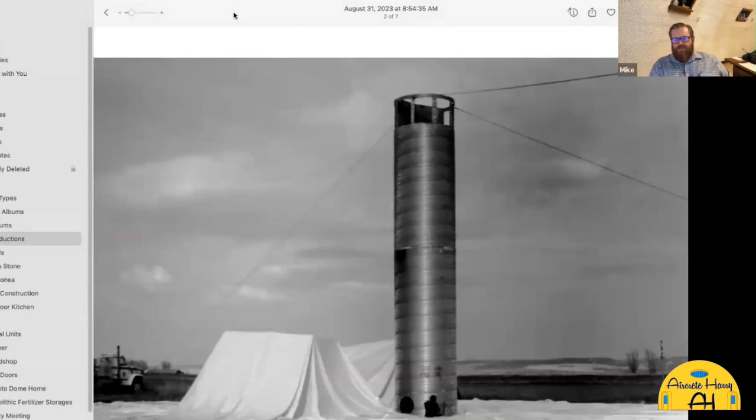The first monolithic dome ever built was built in Shelley, Idaho, as a potato storage. Not quite as pretty as the ones we build today, and neither was the camera's ability to take those pictures. The potato storages had this central column so they could blow air inside of them, through the potatoes, to keep them fresh. Their company before that had really been spraying polyurethane foam, so they'd foamed tons of potato storages and knew a lot about the ventilation systems it took to keep those potatoes where they were supposed to be.

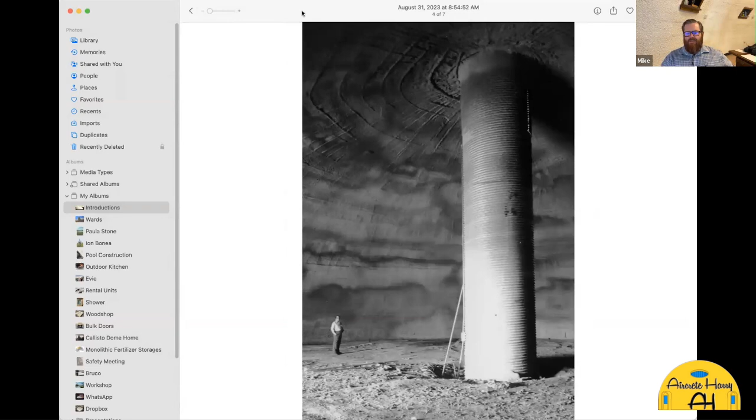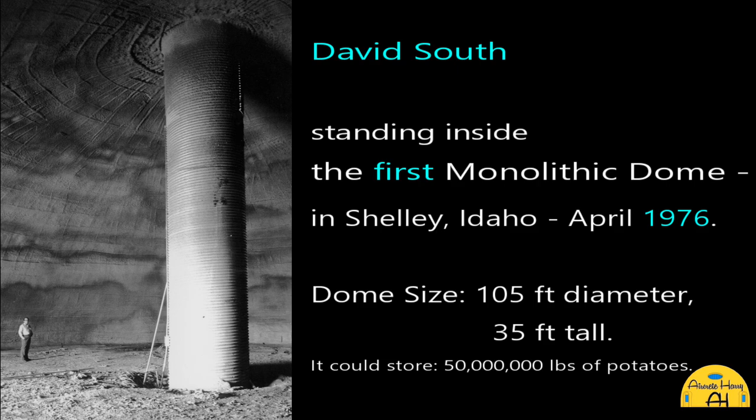There's a picture of that dome, Dad. That dome looks huge. Any idea what size diameter that was? I can't remember, I think it was around 100 or 110 feet. That was the first dome they built, and it was huge. He didn't try a small one first, he went right for the big ones. That's right, and if you knew my dad, that's the way he was - hey, this will work, let's just do it.

I love it. I also love discussing with my dad when he was here, and he was telling us about the first domes and the amount of reinforcement they put in there. Look at that, that is spaced - I think Dad was telling me they spaced it almost 2 or 3 feet apart at first, not as much reinforcement as we put in today.

And there's a picture of me on my first job site, young Mike with his shades, looking real cool, on the right with my safety colors.

It's pretty fun. This picture behind us, I think this is the Emmett High School - I could be wrong about that. This was back in the days where, when they built the first domes, Dad would strip the airform off to expose the inner polyurethane foam layer.

But they quit doing that quickly because it's pretty challenging to coat polyurethane foam and keep it coated well. There's just another fun picture of me there on the job site.

So to answer the question, I've been doing it for a long time. Yeah, you've been doing it all your life.

When domes are first inflated, I was taught by my buddy Dan that it's called a birthing process. Is that what you guys call it also? I guess we're not as creative with the name, we just call it inflating. We had to quit calling it blowing them up because people don't like to hear you say you're blowing up buildings. But yeah, we inflate them.

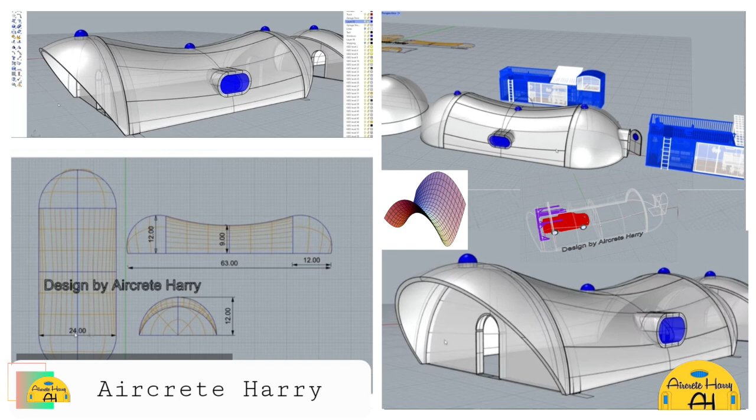And then the second strongest, which is what I'm building next, is the hyperbolic paraboloid, because it's also got two curves. It has a curve in one direction and then a curve in the opposite direction, like a horse saddle. That would be a hyperbolic paraboloid shape. It's basically a 24-foot dome cut in half, stretched out, with a slope going in the middle. With the two curves, I get a lot of strength with that.

So yeah, let's go right into it. You got some videos or photos to show with the dome? Maybe you got a picture we can show of the Eye of the Storm. Before I get too excited about showing you all the cool houses we have, and then getting into all sorts of trouble and getting out of trouble I should say, let's start with maybe that video to explain to everybody how domes are built, shall we?

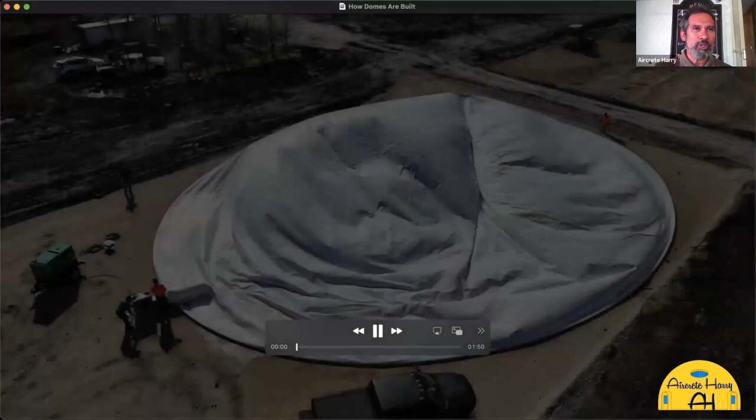Yeah, that sounds great. Now this is the monolithic method for building domes. They have two methods, if I'm not mistaken: the monolithic version, and then the eco shell version, which is the version that I work with. Both versions start the same way.

Here, that's with the concrete floor or the ring beam. This particular project here was for fertilizer storage, kind of a small one.

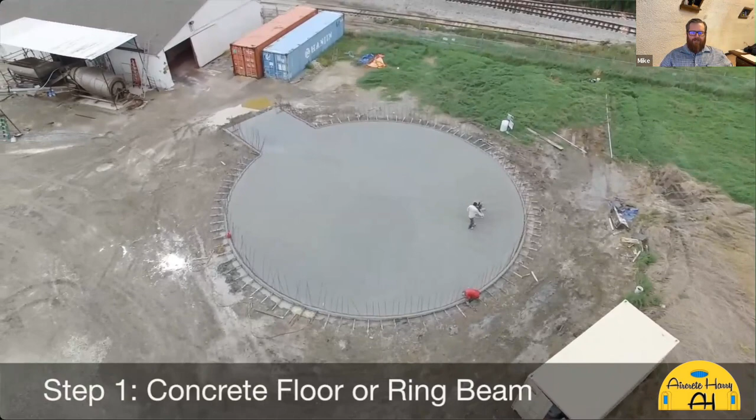The fertilizer storage is interesting. Ammonium nitrate is a big thing in Texas, and it's been involved with a few explosions, particularly the one in West Texas, where they just leveled the town down almost with an ammonium nitrate explosion. So Texas has been very sensitive to that, and the fire marshals are telling all these facilities that you've got to find a fireproof way to store it. Well, the dome is just an automatic win, a complete concrete structure, nothing to burn.

And so we've built quite a few of these, and some of them are quite small, like this one. This is actually only, I think, about 50 feet in diameter.

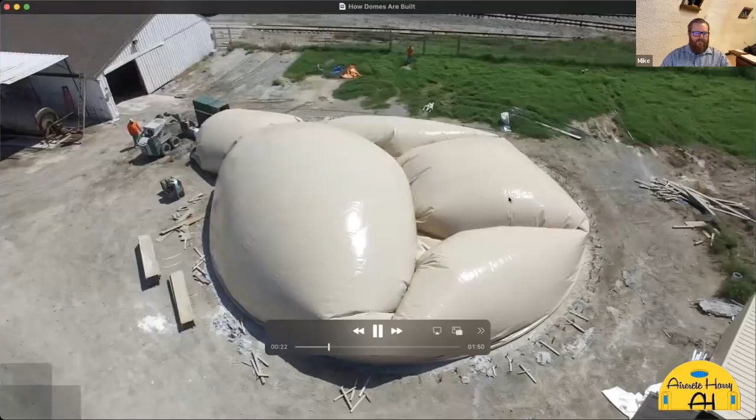It's a pretty small dome. The other method is the ring beam, pictured here, which is just a concrete ring poured on the ground. The airform is then spread over and attached to the beam or the floor, and that's where we inflate it. We don't blow them up anymore, we inflate them.

The airform is incredibly strong. The air pressure is not very great, just 2 inches of water column. Water column pressure is simple to measure with a tube full of water. You can measure the difference in the water level, and in PSI it ends up being about 0.07 PSI.

There's a name for that tool, which can sometimes be a tongue twister for me: a manometer. Super low pressure, but the amount of weight it can lift is incredible.

Now, this is another benefit of the dome airforms if you purchase them from Monolithic: you can have all your different protrusions pre-sewn into the airform. So as you can see here, the window protrusions are in the airform, and they also have that for the doorways. It's really nice to speed up the process, and you'd have your window forms already there. So that's what you're seeing in this image — the protrusions already built into the airform.

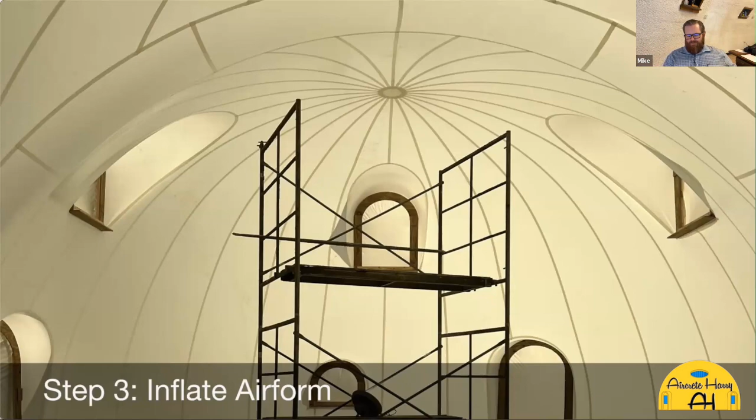That's one of the natural progressions of our business — nobody wants the same airform, nobody wants the same shape of dome. Most dome customers are very creative, they want to have fun with their structure. So we've gotten really good at doing some really creative inflatable shapes, which today we'll get to see a whole lot more of.

So you can kind of see this, we call them saddles — this archway in between the domes, you could walk in between the different ones. I like to also describe this as a soap bubble dome, because you have multiple bubbles or domes connected to one another like a soap bubble. That's the type of shapes you have inside, that's a good way of describing it.

How thick is the polyurethane foam sprayed on? 3 inches typically. For most people, if you don't know polyurethane foam — and I'm assuming this is the closed cell foam — yes, it's considered the best insulation you can get. It's number one for insulation.

What's the R value for that per inch? Well, the R value is only about 7.5 per inch of foam. But we could start a whole other video about R value — my dad called it the 'R fairy tale.' On our website, if you're interested, my dad wrote a big article about R values and what they mean and where they were derived from.

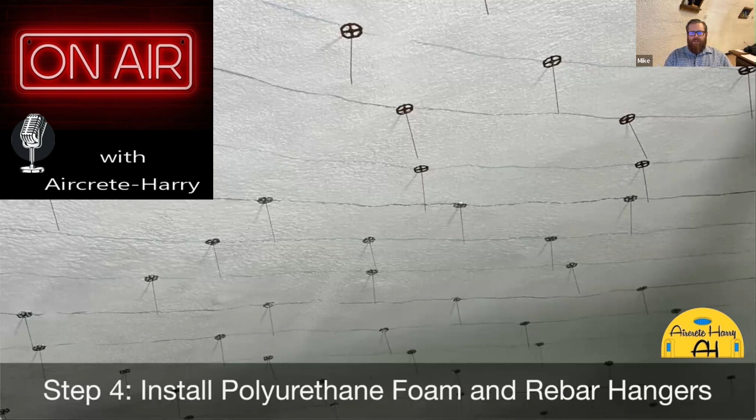This picture shows the rebar hangers. We were a little out of order since the last picture showed the hangers already in place. At this stage of construction, the first 2 inches of polyurethane foam would have been applied, rebar hangers are placed, and then another inch of polyurethane foam is put on top of those stickers to hold them in. We call them stickers or rebar hangers interchangeably. Then the structural steel is tied in next. This building pictured has number 3 rebar, which is 3/8 inch diameter, tied at 12 inches on center.

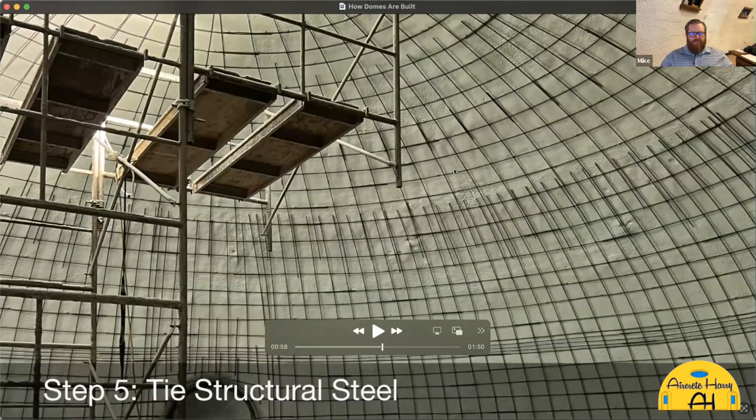The hoop bars are the first bars to go on, and they're pretty easy to keep spaced at 12 inches. But we have a pretty creative pattern as we go up with our vertical rebar so we can maintain that spacing. That's because of the wedge shape, or gore shape, that happens with domes, since you're wider at the bottom and tapering to the top. That's why they have to come up with these rebar patterns like you see there.

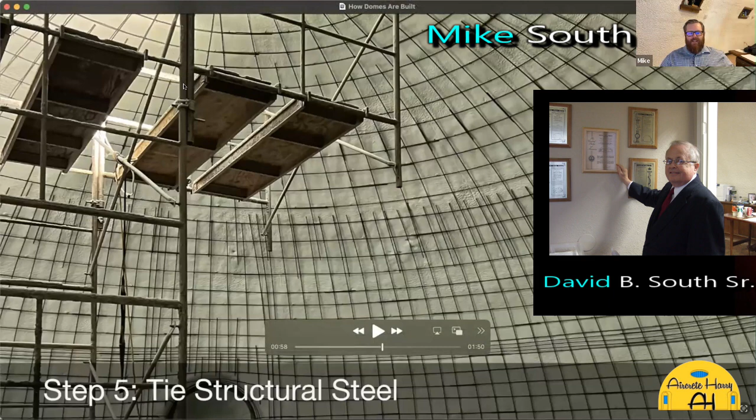On the left you can see this is another invention of my dad's, called the Paxis Polar Scaffold. It's one of the greatest tools we have. It rotates inside the dome with a simple electric motor and gives us really good access to the building.

The last step is installing the shotcrete, where you spray a lot of concrete. That's a fun job, isn't it? Oh yeah, it's a blast. Fortunately for me, I haven't sprayed on the inside of a dome, and I hear there's plenty of rebound, so you could really become a cement person once you're done. Yeah, I actually prefer spraying concrete inside than outside.

There are so many benefits to spraying on the inside. I love the idea that you could build this house in wintertime because you're on the inside. Once your air form is inflated, it doesn't matter what the weather is outside, you're working indoors, protected from the elements. That's another big benefit to using this system, where if you live in an area with bad weather all the time, or it's always rainy, this is a system to really consider because everything is done on the inside. I love the whole idea of this.

Growing up building domes, this was my favorite part of the process, spraying the shotcrete. It's really fun, because it's fun seeing it become permanent. Once you spray it, look at the beauty of this.

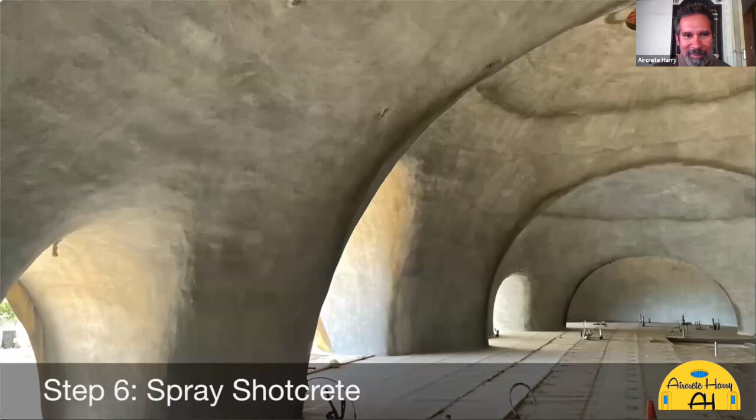Wow, that's huge. This is a dome we built last year, just north of the Dallas-Fort Worth area, and it is a huge home.

This is a deluxe house. He's almost finished with it. I think the second quarter of next year we're going to go up there and do a feature article and show the inside. It's hard to see in the picture, but over here you can see the sunken movie theater. He's going to have a little bar in the movie theater, a huge master bedroom, a huge open area, and very large skylights at the top.

What's the size of this? Was this also one airform or multiple airforms? One airform. That's beautiful. I really like single inflation buildings. I think they're so much more fun and economical to build because you can just inflate it and go. But they're so impressive and so much fun to be a part of.

So this looks like 40 feet wide by 150 feet long. How big is this? I believe the center dome, the big dome, is 50 feet in diameter. I don't remember it exactly, but it's about 105 foot long in total. Wow, that's awesome. I'm getting excited about my hyperbolic paraboloid because mine is 24 feet wide and 64 feet long. It's just a huge structure.

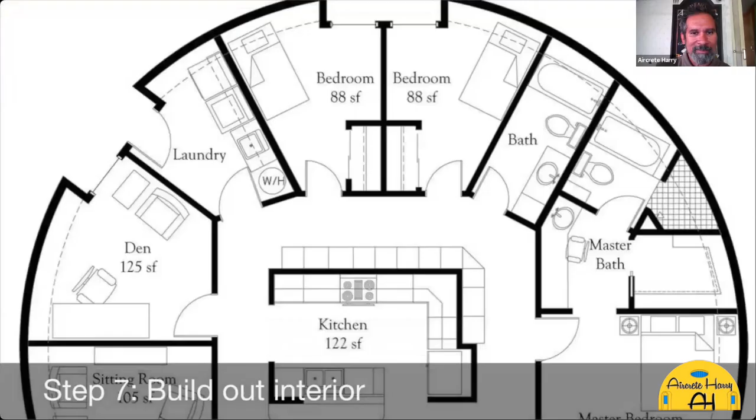So I'm going to go through and show some more interior pictures, we'll just let this play through. This is actually my house that I live in. We'll look at some interior pictures, but dome homes are quite beautiful. Although they are incredibly impervious to tornadoes and super energy efficient, they can be quite beautiful on the inside, and they create a space that's unlike any other to live in.

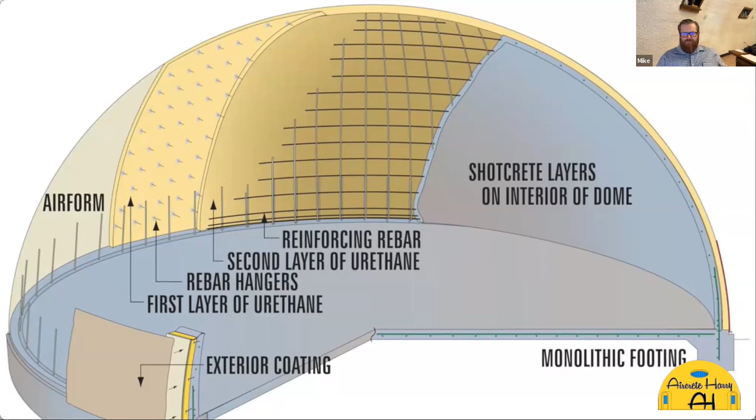I think it's important for people to realize, because a lot of people hear dome and immediately think they need all custom furniture. And I've proven this by walking through your father's double dome, two 40-foot domes in Texas, and you see everything is standard furniture. So you don't need to worry about needing custom anything - you can get away with wherever you shop for furniture, no issues.

I grew up living in a dome - my whole life I have lived inside monolithic domes. So to me, some of those questions are silly, like, of course you don't need to buy round sofas to live in one. But it's a pretty common thing - the first thing people think of is, well, if everything's round, everything else has to be round too. And well, of course not.

That's something I'm always getting asked by people - what do you do about furniture or cabinets? And I'm like, it's all good, you can easily put a flat wall in front of if you have a high curve. This is why I personally like stem walls in the domes that I build - always put a stem wall where you could be against the dome, so you could be 6 feet tall standing against the wall and still have that space.

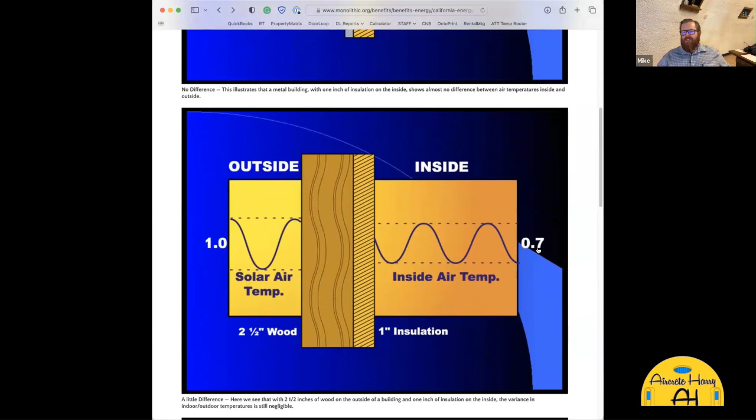So then they went into the concrete walls. We're going to build a big, thick concrete brick wall or concrete wall, and we're going to have an inch of insulation on the inside. You can see it did a pretty good job — you've only got 0.5 of that temperature swing coming inside.

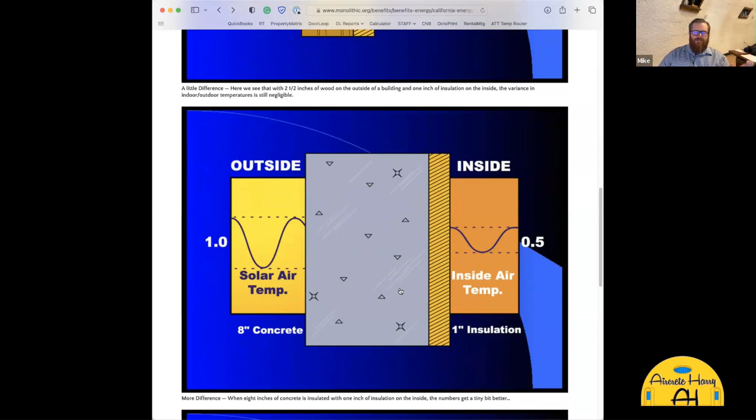But this is the fun part, and this is why I show this slideshow where I can roll back and forth. Take those same components and swap them around. 0.05 — that is 10 times better. Same materials, just in a different orientation.

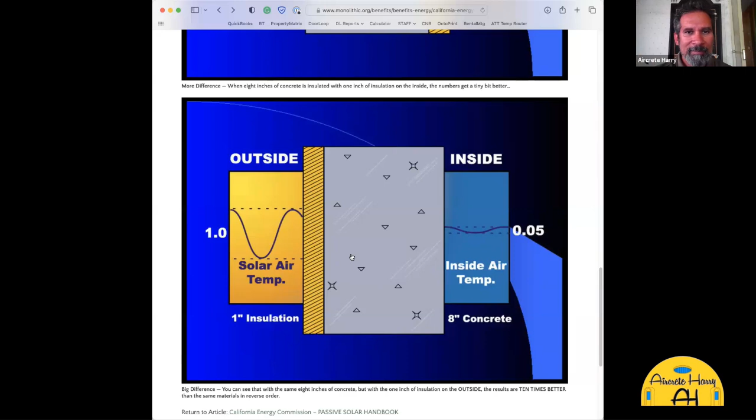So what does this tell us? It tells us that we insulate against these temperature swings from the outside. The concrete does a couple of things — it's obviously an insulator itself, but what's interesting is I like to call it a thermal battery, like the Prius on the road, the hybrid. That concrete, that mass of concrete, takes a lot of energy to change its temperature. So if you live inside a concrete home that has insulation to protect it from the exterior temperature swings, that concrete is going to stay cool.

I'm a Texan, so I use the cool analogy — it's going to stay cool inside. So if my air conditioner goes out, which at my house has happened a couple times, it takes me days to realize it's happened, because the concrete is so cold and there's nothing outside to affect that temperature. The only thing that can affect that temperature is me cooking and cleaning and breathing, or letting the windows bring in some solar energy.

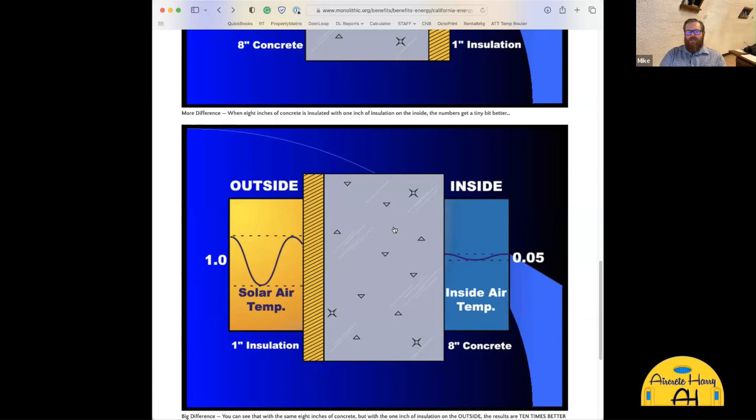So it is incredibly insulated, not only because we're using the world's best insulation, but because of the configuration of the dome. Most buildings today are the opposite — they'll have a concrete block wall and then insulate it on the inside. While that's a pretty good system, just swap them around and look at the difference it makes. So the dome takes advantage of the concrete mass, it puts that to work.

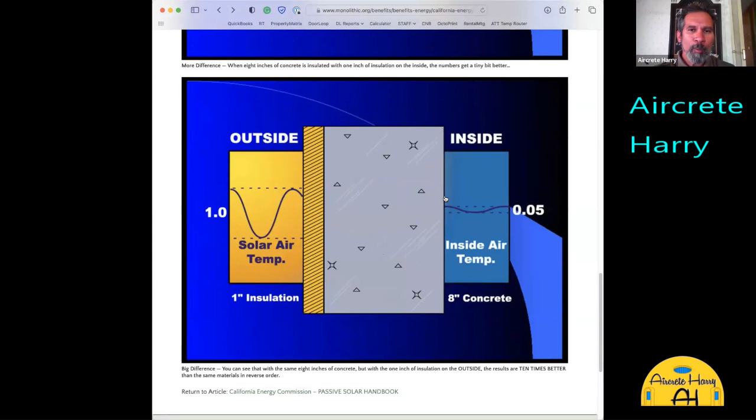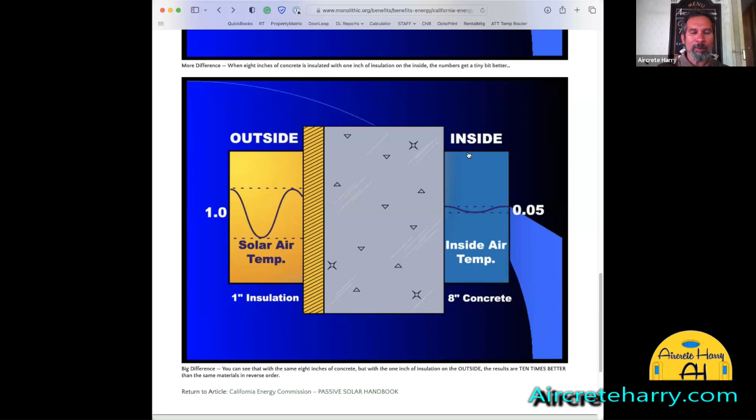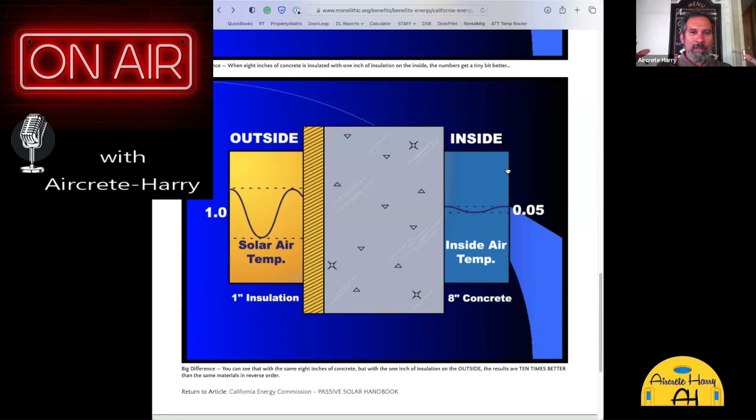I try to explain to people why I build the way I build, in that when I'm building with the eco shell and using Aircrete or Epic material as the insulator, I like to make sure that inner shell on the inside of the dome is a stucco mix, a sand cement mix, because of what Mike just said — it acts as a thermal battery. So if you have air conditioning on, those cement walls will get cold and radiate cold. And if it's wintertime and you have the heat on, they'll absorb the warmth and radiate the heat back at you. That's why this system is great, having your dense material on the inside and your insulative material on the outside of your structure.

For this reason, because people are always concerned about R value, R value, R value — and like your father said in the article, it's basically a fairy tale, because there are so many other factors that come into play that aren't taken into account. So I added those points to bring up, so that if someone's getting a custom house, maybe they're not going monolithic and they're going Aircrete Harry style and want to use Aircrete, I wanted them to have a full picture — explaining why it's better to have your insulation on the outside because of the thermal mass you have on the inside.

I also spoke about special paints. I have paints with ceramic beads. These ceramic beads are like a powder, but they're so tiny and have a hollow vacuum inside of them, that once mixed into paint, or what I'm doing now, mixing it into cement, it acts as an incredible thermal barrier.

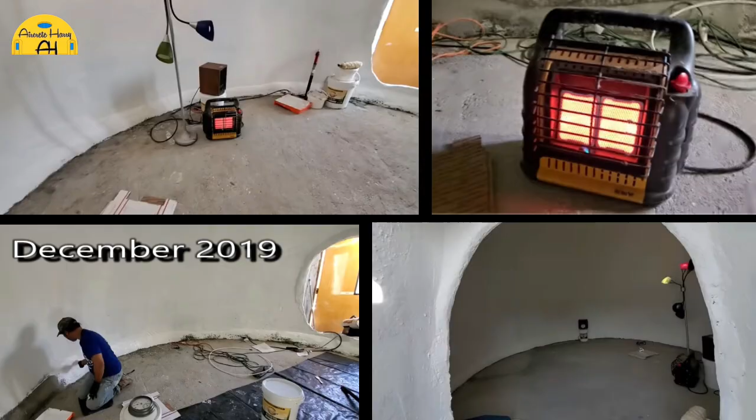I've proven this in my video where the dome I built in 2019 had one Mr. Buddy heater inside, and this was in December. The heater got the dome up to about 55 degrees, and that was it. After painting the dome on the inside with this special paint, it brought the temperature up 20 degrees.

So if you're building a custom home using custom insulation or whatever, there are other factors that need to be discussed with your structural engineer and the building people, about all these special materials that are out now that we can get, like this paint.

As an example, the company who sells this ceramic bead paint made an example on their website where they had a canvas tent and painted the inside and outside with this special paint that has ceramic beads in it, which act as a thermal barrier. They said you could live in this tent all year round, winter or summer, because of the efficiency of these ceramic beads.

So again, you could build a structure in Texas in a hot climate, say an eco shell, and literally just paint it with this special paint and it'll have the same effect.

Now, the problem is you probably wouldn't get approved to build this, because people have to learn about these special materials and how they work. But it's just an example that there are other materials out there that can really increase the efficiency of heating and cooling.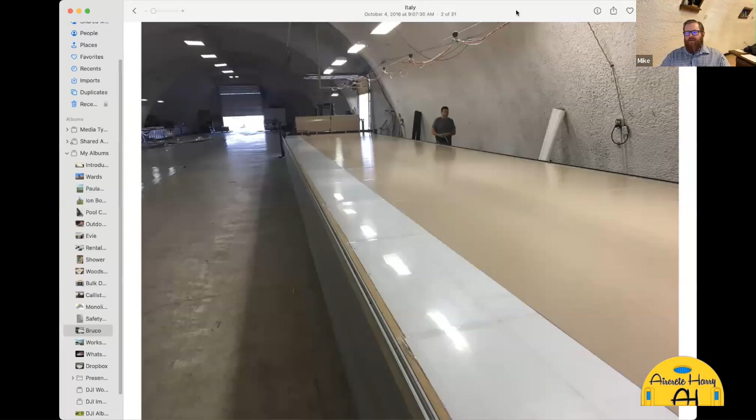One of my favorite things to do is walk people through our manufacturing facility. You've been in there, right, Harry? You walk in from the Texas heat, and it's just as cool as you'd want it to be, and you look around for the air conditioner and can almost not find it.

It's amazing how cool this entire place is with just two little mini split units, like you'd find in people's homes. It cools this whole 12,000 square foot manufacturing facility.

This is a facility they call the Caterpillar, and they've actually painted it to look like a caterpillar. It's huge. It's made up of, I think, 7 domes.

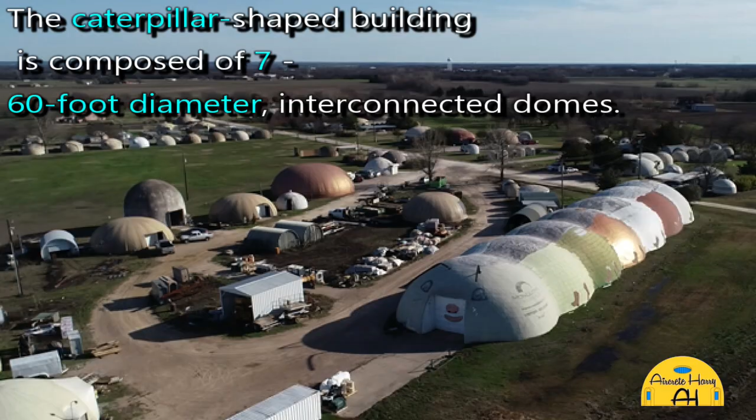This is their room where they make their airforms, and as you can imagine, they make airforms that could be hundreds of feet in diameter. They have these sonic welding machines there, and probably a CNC cutter too, though I don't see it right now.

That's what you're seeing here, this is the plotter cutter. It'll plot the seam marks and match marks, then cut out the fabric right here on this table. Is that vacuum down? Because the fabric looks really flat. It is, yeah, it's a vacuum table.

It's about an 80-foot long vacuum table, but our panels are often much longer than that. We've had panels where we've had to pull it off this table four times before we're done cutting just the one panel. That's huge. And we've had some pretty large domes built through here.

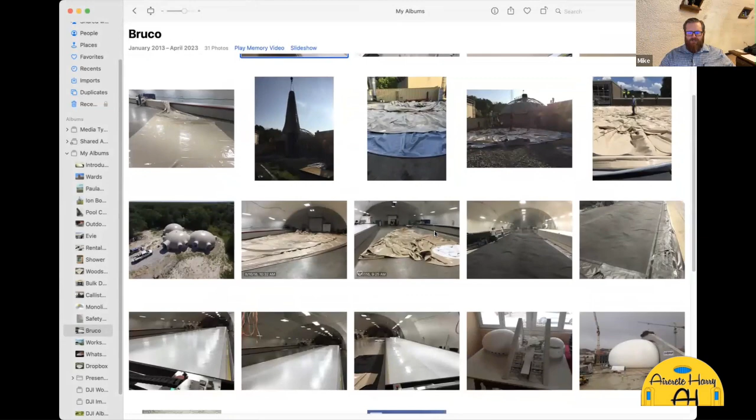Let me see if I can find a picture of the welders for you real quick. These are radio frequency welders. They use the same microwave technology that you use to heat your food up, essentially using microwaves to heat the material and melt it together.

I never really comprehended what a frequency welder was, but that makes sense, it's like a microwave sending out frequencies. The great advantage with these RF welders, compared to hot air welders or wedge welders in the industry, is that you can measure the amount of energy that goes through the bar. So quality control is the main goal, making sure every weld is done exactly right.

If there's foreign material or moisture that would prevent that weld from happening, the computer would actually know because it measures each weld. It'll kick out an error and say there's something wrong with that weld, you need to revisit that.

You mentioned the air pressure and how critical that is. Imagine how critical it is to have these massive air structures with men inside working, that the seams are working and that they work well. So we take quality control pretty seriously.

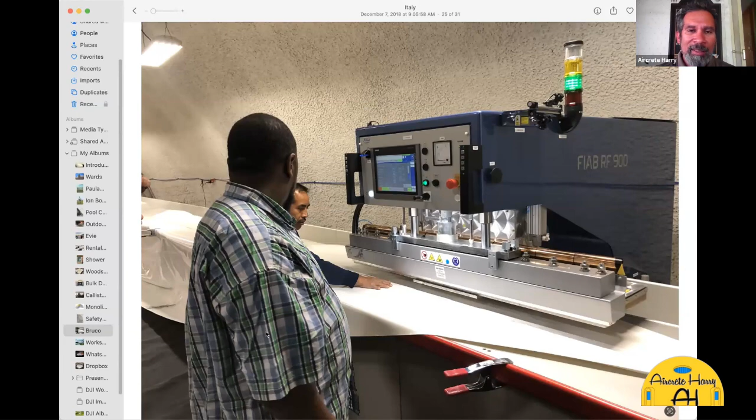You also have a smaller version of this machine as well. We have a couple smaller machines, but mostly we use the same machine, even for some of these multi-dome structures. There's one in California that I always thought kind of looks like Pikachu with these Gothic arch augments there. This is another one that we've built in Fredericksburg, Texas.

I just see nothing but beauty in this. It's so beautiful to see, and that's just one air form. This is amazing. Well, this project is really fun actually — the patio back here is actually a 40,000 gallon water cistern that we built.

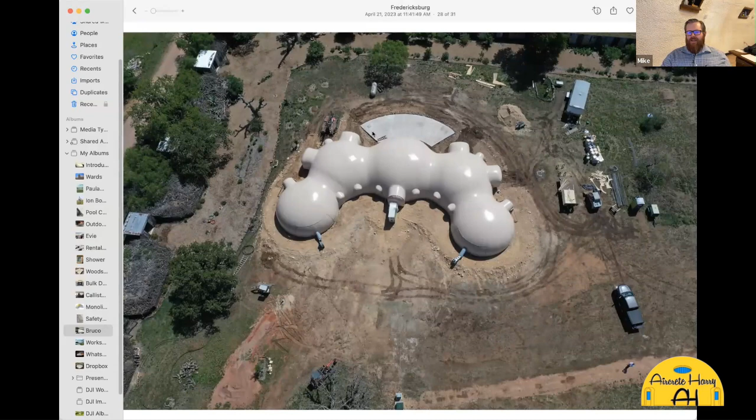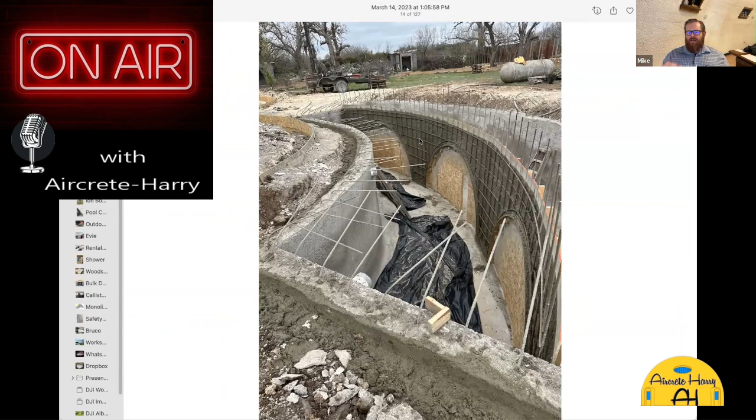It's basically a swimming pool construction method. We dug it out, earth formed it, sprayed the tank. We built a center wall that helped give the lid a little more support, and we did this with the single form method — we set up one single side form and shoot the shotcrete right against the forms, then form and pour a lid right on top of that.

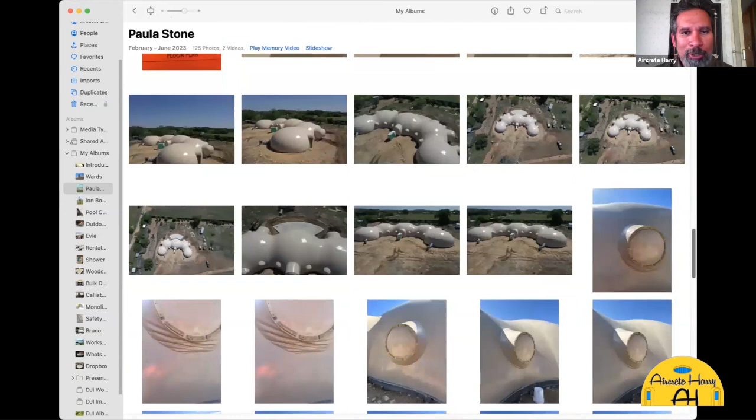I like the way you made those arches for that support wall, that was really nice. This tank looks awesome inside. For a moment, when I saw those arches, I thought you were going to put a piece of glass there and have a giant aquarium. Yeah, that's a shot from the inside afterwards.

That's great, a 40,000 gallon tank. You were talking about the Romans with that arch, right? There's some archwork there for you. So this is a huge water tank, and what we're doing is capturing all the rain — on any section of the dome, if it gets rain, it's going to get funneled into that tank.

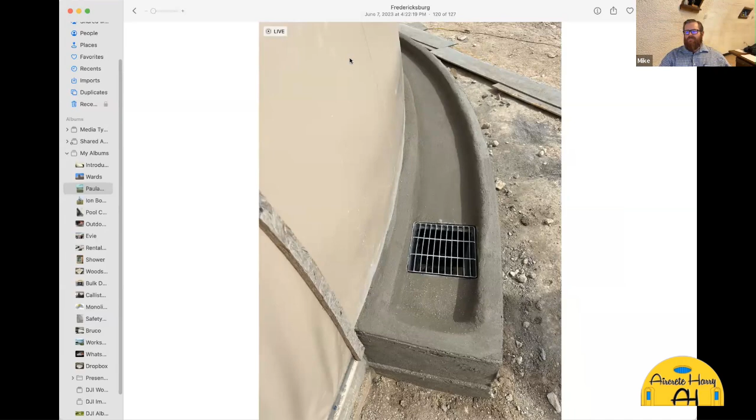This area of Texas is pretty dry, but when it does rain, it really rains. So our goal was to create a catchment system that could, even in the deluge, capture every single gallon of water that comes down.

Have you done a catchment system like this before on domes? My dad built a few. This was Mike's first one. But David up there in the north, they built quite a few water tanks. What we have not — this is our first one.

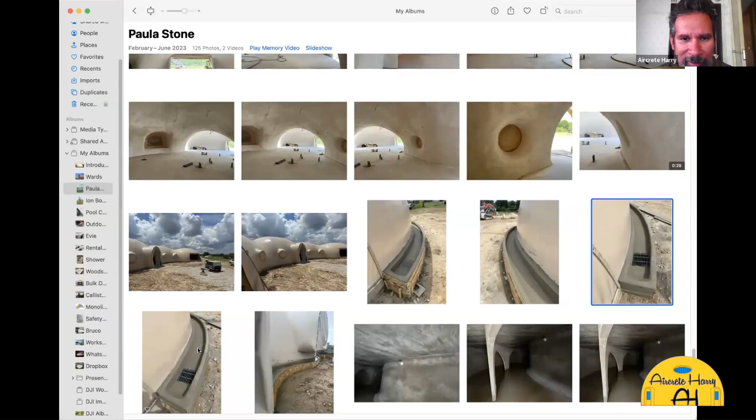I like the way it looks, the catchment going all the way around the domes to catch — yep, all the way around. This is before the catchment system was installed, but even around where the augments are, this trench terminates right against this augment. Even water that lands on top of those augments, what we call the doors, will just go around the augment right into the tank.

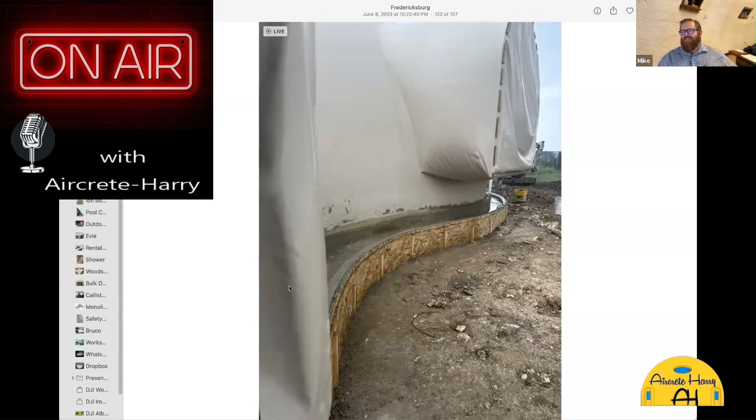This rain that's pictured here happened while we were doing this, which was the first time it had rained on the whole entire project — of course it rained while we were working on this. It washed a little bit of it away, so we had to come back and redo it a little bit.

But this dome is beautiful on the inside. We've done a couple really fun things — these round windows are really fun. They're actually installing the glass on those as we speak.

These windows are really fun too, these big, large ones. That's going to be completely glass at the end of it, but then she's going to have pillows and stuff there so you can lay in the window and read while you're doing it. It's going to be a very impressive structure. We'll have pictures of the glass work — I've got crews there now installing it.

Is that like a 3 foot window sill for them to sit down on? Yeah, it's about 3 feet.

It's a beautiful looking structure. I don't know if it's just us, because we're into domes, but the curvature and those arches on the inside is just beautiful.

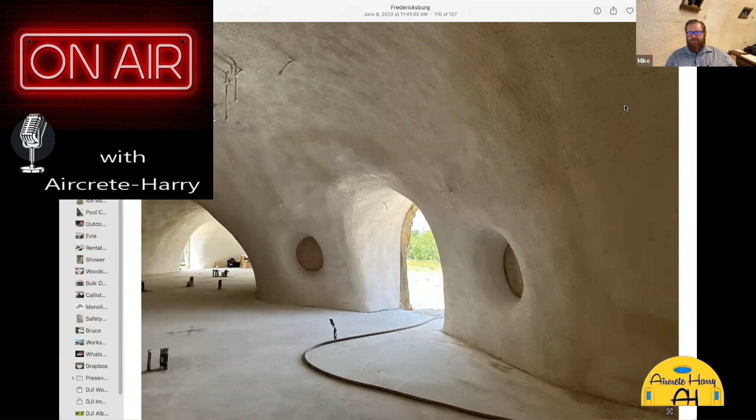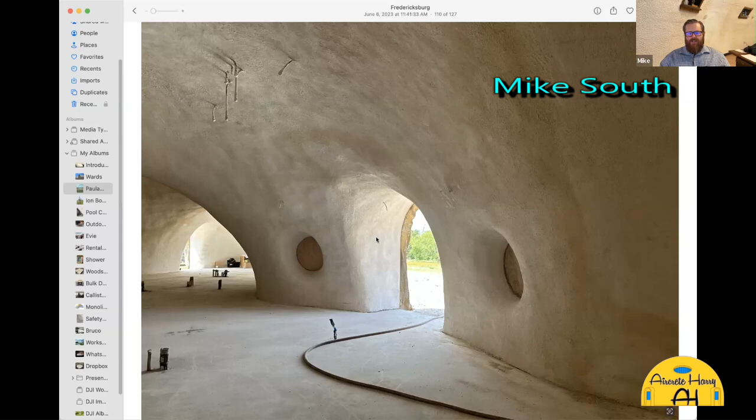What's interesting to me about this, and I'll get on my pedestal and preach for a minute, is that craftsmanship in the world seems to be fading away as we go to these throwaway buildings, the same old walls and the same old roof. My crew that does this shotcrete work has been doing it for 30 years, and they are real craftsmen at these kinds of curves and how beautifully all of these elements tie together. I'm very proud of my crew and what our company is able to do, because we are making some beautiful structures.

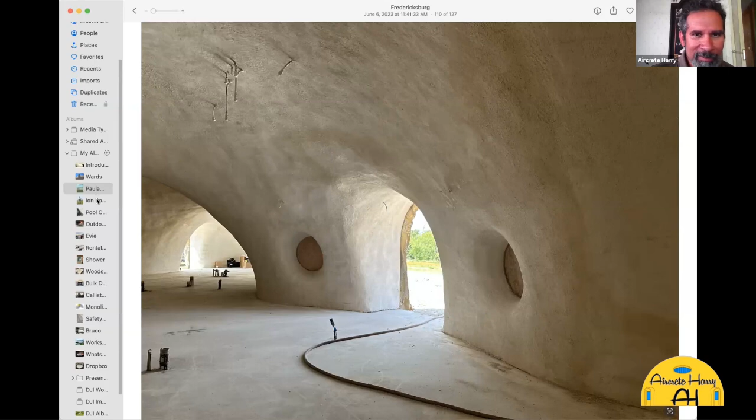They're in North Carolina right now, and they just got rained on by that small hurricane coming through. This is the dome they inflated yesterday - this one's nice, smaller. It's a 37-foot dome with two 34-foot domes off to the side.

It has one blower - that's the primary blower right there inflating. We've got a secondary blower sitting on standby as a backup. We always have a backup.

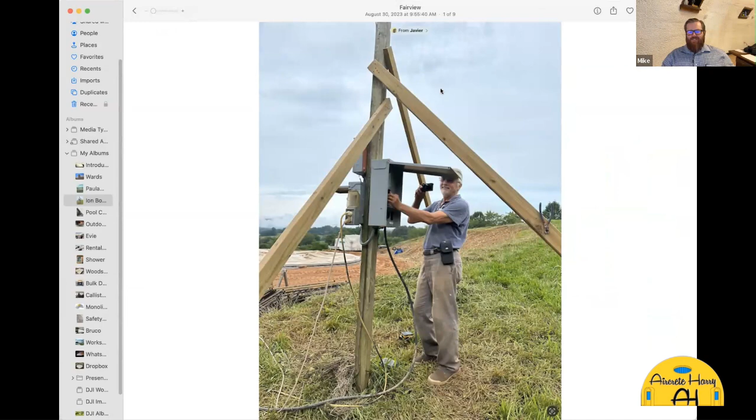This is the customer here, getting ready to throw the switch with a big old smile. This is the birthing moment, the final push - he's going to flip the switch, and then he'll have an inflated home. So cool.

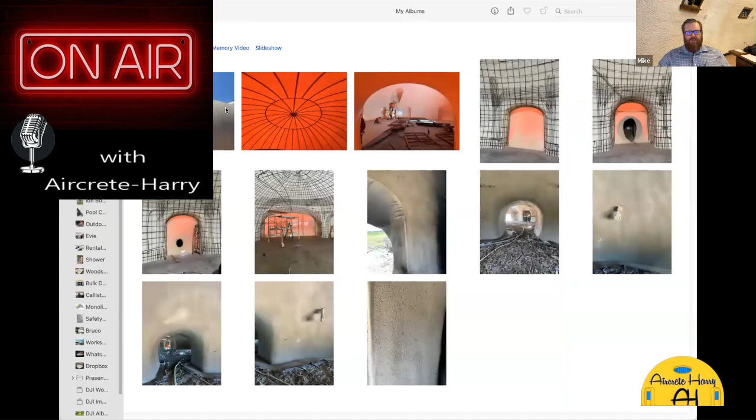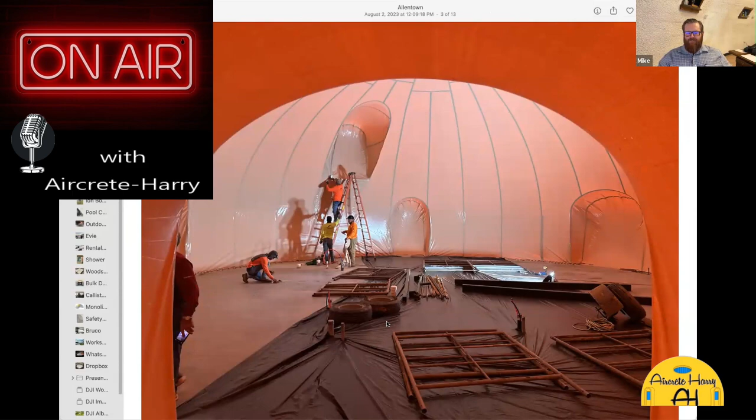The other one we just inflated the week before was in Allentown, Florida. This is going to have a two-story section where the home is. So this phase, we've just inflated the airform - you can see our scaffolding laying on the floor that we'll assemble after. We really rocket forward from there - the foam is done, steel is there, and we've got some electrical conduits being put in.

Let's see if we can find some shotcrete pictures for you. There you go - so the shotcrete is done. This is a rough textured shotcrete, and you can see here on the floor we've got all of the rebound. This dome, like I said, was just a couple weeks ago, so it's brand new.

I could show a lot of pictures - what would you like to see? Do you want to see some storm video? I've got a little bit. Yeah, let's show the storm - that's always the fun stuff to see.

We built this house in the Keys, out Key West, Florida area - this one is actually on Cudjoe Key, for Paul Tinsley. We can flip through some pictures of his finished dome - we just recently did a feature article on his house, which looks fantastic. Look at that view, right on the water.

I like that everything was thought out, with the dome built on columns so you're above the ground. So God forbid there's another storm - there's a storm now in Florida - water can surge and go under the structure. You might have some damage to your vehicles or whatever, but you could still be safe in the house during a storm. The house is beautiful.

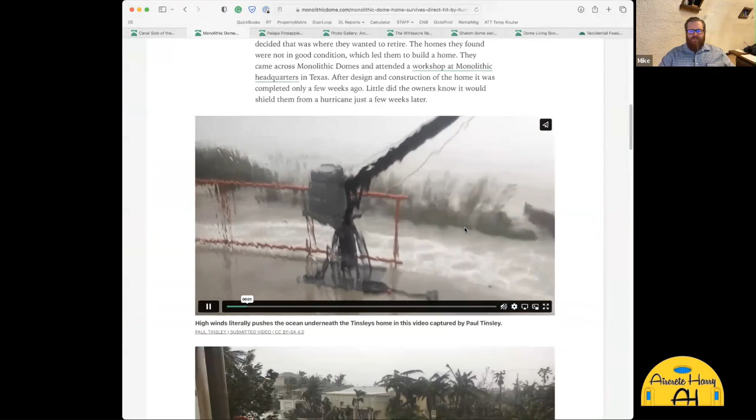The fun part for us is these kinds of shots - look at that. Hurricane Irma hit his place, and I've got a little bit of video here. He stayed inside the house while it was happening - he didn't evacuate, he said 'No, I'm just going to ride it out in the home, I got a dome for that purpose.' So he did, and he said it's just incredible.

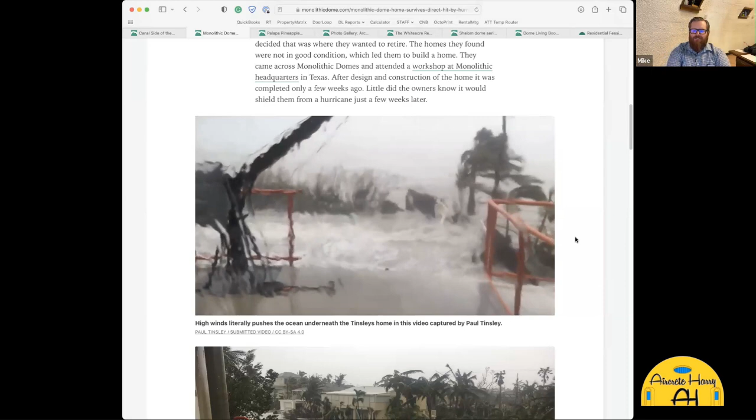It's incredible how quiet it is inside - you look outside and see the storm, but you don't hear it. I'm amazed, and the whole time because I'm here in Colorado, I'll look at my security cameras and see the trees leaning sideways.

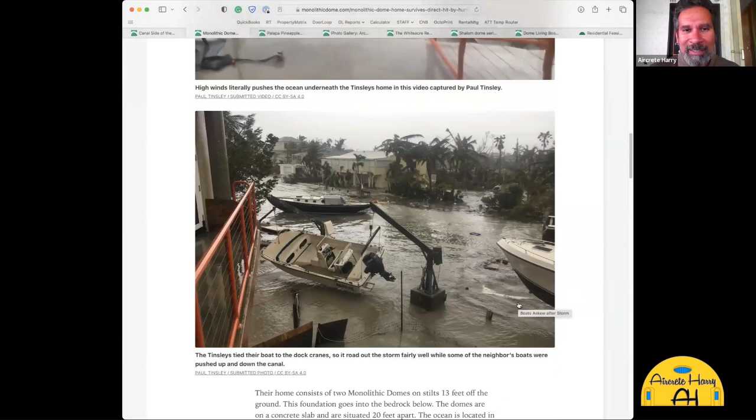I didn't even realize it was that windy because you just don't feel it inside the dome. The other reason you don't feel it is because normally people live in flat structures, square homes, and those flat walls get hit by wind and can cause vibration, which makes a lot of sound.

Paul told me a fun story that the eye of those hurricanes is as real as you've seen in the movies. When that eye comes, it is just peaceful and the sun shines. He said that while the eye was there, he ran downstairs to tie up a boat he'd noticed wasn't quite tied up. He barely made it back in the house, scrambled up the stairs, and barely could get the door shut when he got in.

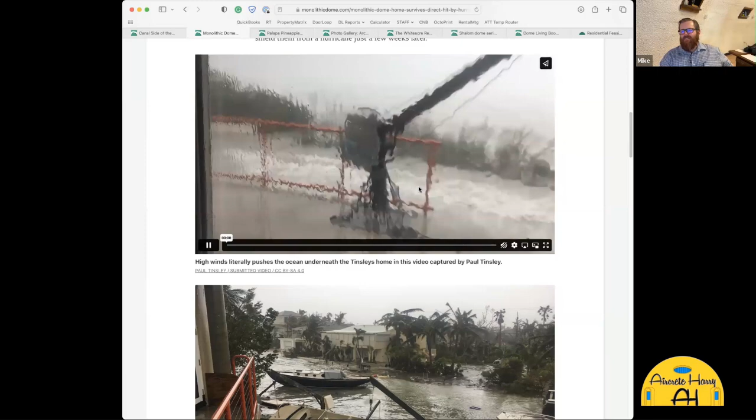His house is going to go through more of these storms, and he'll be ready. It's a beautiful looking home.

What size was that home? It probably says in the article, but I'll just guess it's about a 45-foot dome, and this one was probably 36 or 38 feet, something like that.

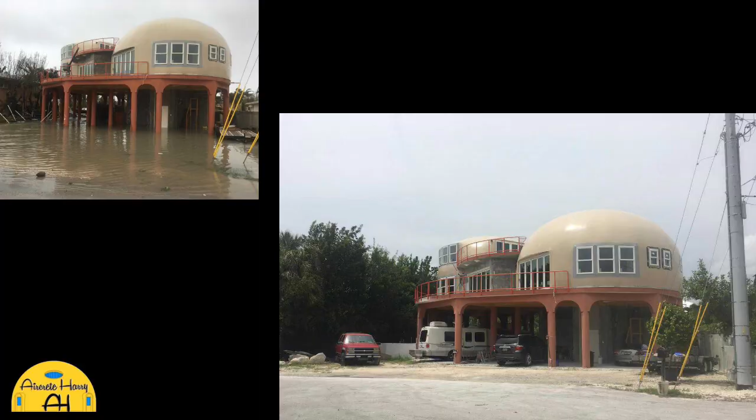Javier, our main crew chief, the guy who does most of this kind of work, was talking about the challenge of mounting these window bucks on top of those stilts. You can see there's no room around there, so it's a little bit of a challenging build up there, but totally doable.

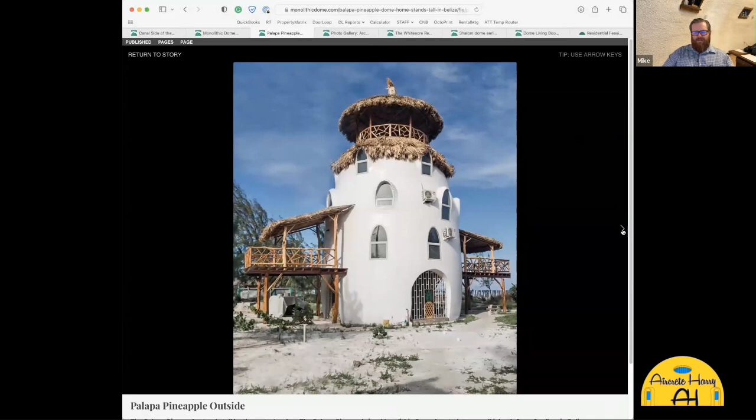This was one of my favorite structures, the pineapple, in Belize. We have a guy, David Spellings, a wonderful guy, who retired there and built this. There's a picture of David there. He built this 5-story dome. It's not very big in diameter, only like 25 feet or so.

It really is such a cool house, right there on the coast. What's really fun is all the woodwork, done with Belize labor and Belize wood, and it's just beautiful inside.

Is that the cap they made on the ground before putting it up? I wondered what the story was there. Oh, it's the thatch cap. It's not needed, but for the look he put it up there. He wanted to blend in.

Look at that, he's all pineappled out with his pineapple home. It's fun. We talk about the craftsmen - you go to these other areas and those craftsmen are there doing the work. It's really fun to look at these pictures.

There's a ton more. We could spend hours going over some of these new homes that we've built.

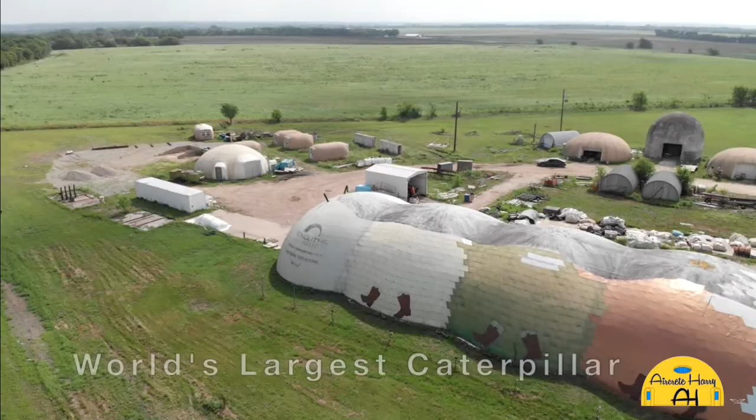So Mike, another question I wanted to ask - I noticed when I was visiting Monolithic Dome Institute in Italy, Texas, your office dome has a massive amount of dome missing from the front. Is it correct that like 40% of a dome could be missing and it still be structurally sound? Yeah, that's correct. We've got quite a few domes that are cut away almost completely. In fact, I've got a fun picture of a house that's got some of that.

Because that's a lot, like 40%. Obviously 40% on one side is what I'm referring to, but you could easily remove 40% in multiple areas, altogether adding up to 40%. You can have big window openings if you wanted, to let tons of light in, and big doorways if you wanted, and you wouldn't have to worry because you'd still be structurally sound.

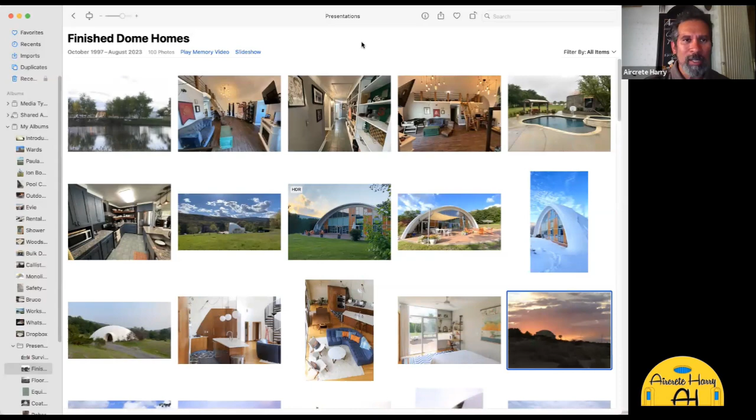When it comes to the dome, I know you guys build domes for people, and you also teach workshops so people can build their own domes or get into business building domes. I'm guessing most people get into business. Like, I purchased all my equipment from you guys - my shotcrete machine, my blowers, a ton of airforms. I probably have like 8 different airforms from you guys, and I could easily go into business if I wanted, building domes for people with the airforms that I have.

Yeah, building with the Aircrete Harry style. The only difference between what I call the Aircrete Harry style monolithic is I'm building monolithic eco shells, and I'm adding my insulation to the outside of that, because you can vary the thickness of your Aircrete or styrocrete, or styro Aircrete, for more insulative mixes.

This was mainly done to make things as affordable as possible. The eco shells - you would not want to build an eco shell in a cold climate area solo, but eco shell with insulation on it works. Some people have sprayed the exterior of the eco shells with spray foam. In my opinion, if you're going to do that, you're better off just building monolithic style right from the get-go, because it comes out much prettier, much nicer.

The airform for monolithic stays in place, giving you another protective barrier. Some people choose to put a stucco coating on top of that for extra protection - that's another option people have. Depends on your budget, of course. Again, the thing for me with these airform structures is the speed.